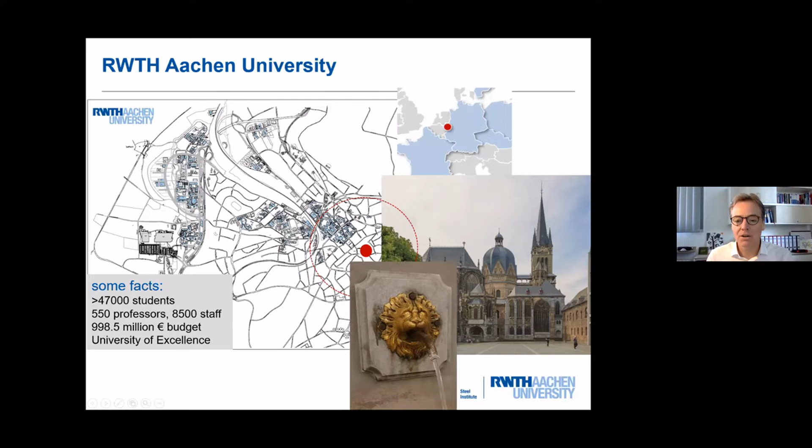And then we have Aachen University. It's one of Germany's large technical universities. We have a turnover of about 1 billion euros per year, and we belong to Germany's Universities of Excellence.

The university had grown, and that is the Aachen city center - it became larger and larger. We have an outward campus, and it spread from the Aachen city center to the Netherlands border.

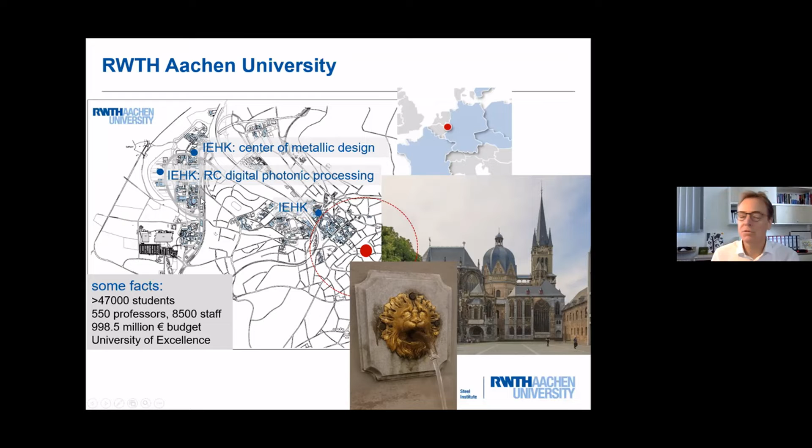Here you find the Steel Institute, and we have two further locations: the Center of Metallic Design, where we do testing, or servohydraulic testing, and here we have a research center for digital photonic processing, meaning additive manufacturing.

Mining and metallurgy was a nucleus 150 years ago, and in 1910 the Steel Institute was founded by the famous Professor Fritz Wüst - after him the iron oxide, wüstite, was named. In 1945, it was unfortunately completely destroyed during World War II. That is how it looks like today.

We are about 110 employees, and our research covers the complete value chain of engineering alloys, from casting, forging, additive manufacturing, analytics, and testing in simulation and experiment. And that covers also internal corrosion issues.

Let me explain what internal oxidation is. Internal oxidation occurs in a binary alloy where the oxygen partial pressure is not sufficient to oxidize the substrate, but is sufficient to oxidize the alloying element B. Then oxygen diffuses into the alloy, B diffuses outwards, and we get internal B oxides. Essentially, a similar situation is given if...

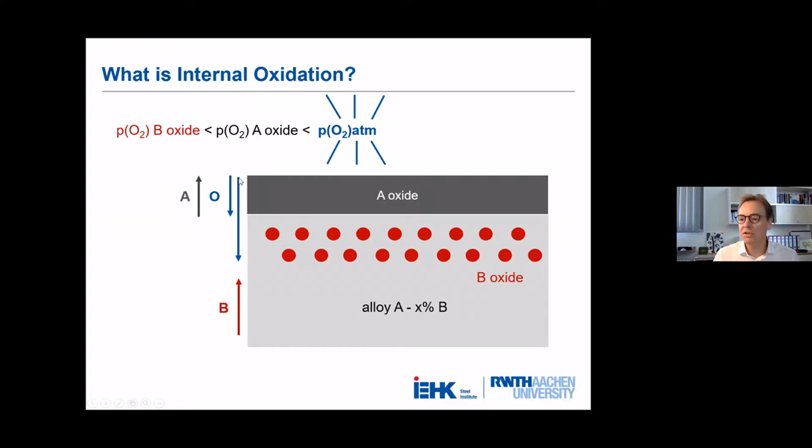The equilibrium partial pressure of A oxide is higher than that of B oxide... sorry, that's the wrong way around - so when it's lower than the oxygen partial pressure, then A oxide is formed. So that must be the other way around, sorry for that. Then the superficial A oxide is formed, and its further growth is governed by oxygen and A diffusion. But at the same time, at the interface between the A oxide and the alloy, the oxygen partial pressure is still sufficient to form internal B oxide, as shown here - again driven by oxygen diffusion and B outward diffusion.

Here we have an example: a nickel-10-chromium alloy. Here we see the formation of nickel oxide, which is a fast-growing oxide. At the same time, we have the situation of internal oxidation of chromia. Of course, due to the consumption of nickel during the process, the part of the internal oxidation will soon be inside the nickel oxide.

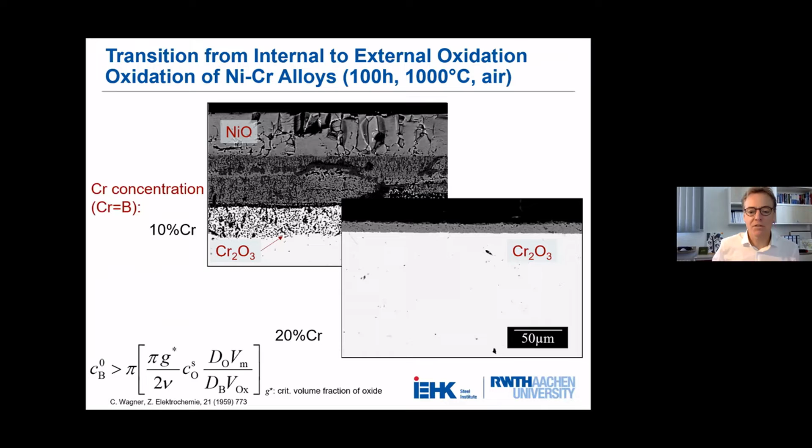But if we increase the chromium concentration to 20%, then the outward B diffusion is much higher, and we get a superficial scale instead of internal oxidation. That is basically the concept of selective and protective oxidation, and the minimum concentration can be predicted according to the famous Carl Wagner theory of internal oxidation, where CB-zero is the minimum concentration for the transition from internal to external oxidation.

Internal nitridation is essentially the same. We have the situation - sorry, that must be the other way around - if the equilibrium partial pressure of B nitride is lower than the nitrogen partial pressure, then we get the formation of internal B nitrides. The nitrogen diffuses inwards and forms B nitrides.

Here you can see an example of a nickel-chromium-aluminum-titanium alloy, and here you see the internal nitridation attack. Once we apply a tensile load on this situation, we see brittle cracking within this near-surface layer. If we have a closer look, this is due to the complete coverage of the grain boundaries by internal nitrides.

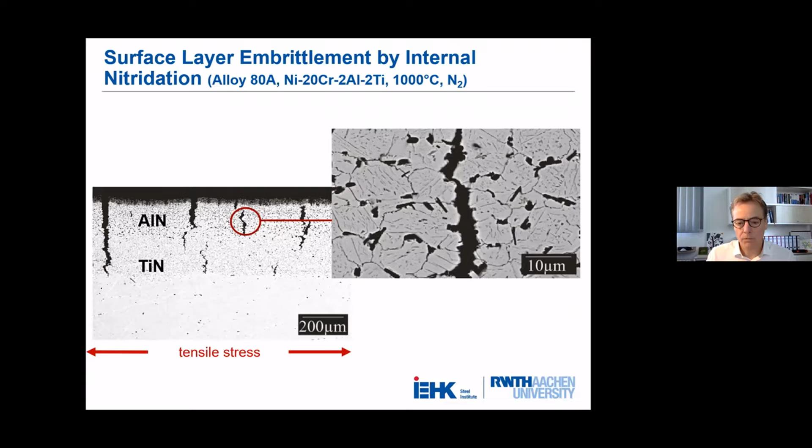Both internal oxidation and nitridation can be described by Carl Wagner's theory of internal oxidation. Here's the solution of the diffusion differential equation for oxygen diffusion and for B diffusion in an alloy AB.

These two solutions can be coupled by a mass balance at the precipitation front. That means the flux of oxygen diffusing to the precipitation front and B must be essentially the same with respect to the stoichiometric coefficient. Assuming a parabolic progress of the internal precipitation zone, and the condition that B diffusion is much slower than oxygen diffusion, we arrive at this very simple equation for the progress of the internal oxidation or nitridation front.

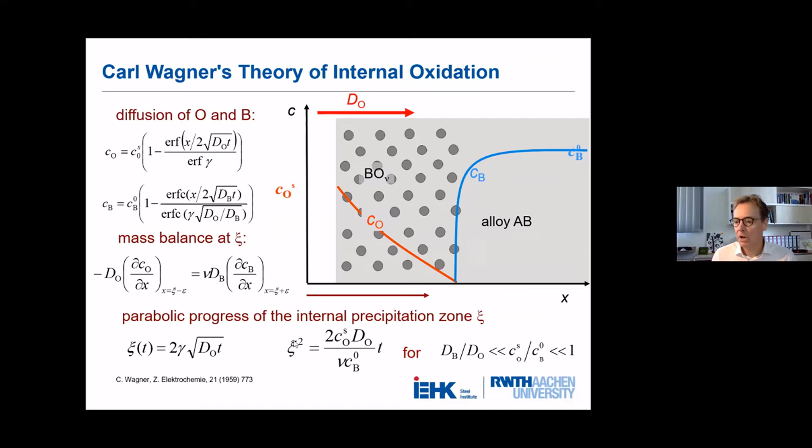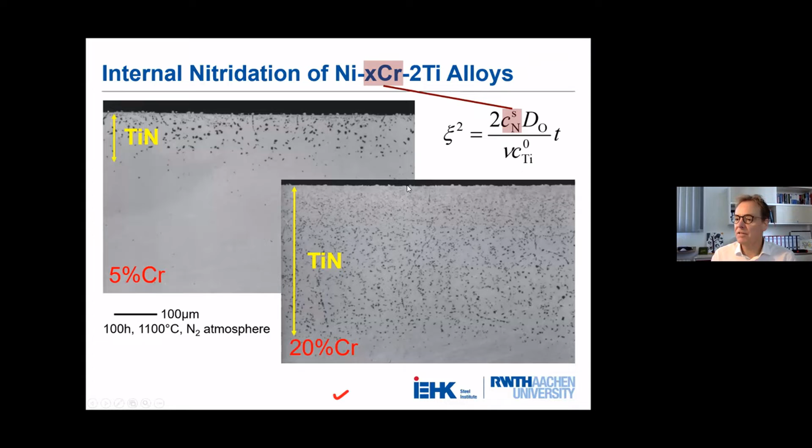If we increase the solubility, meaning more nitrogen, then we get a higher internal nitridation depth, as shown here, because adding chromium increases the solubility for nitrogen. Then of course the nitrogen diffusivity also plays a role in this equation.

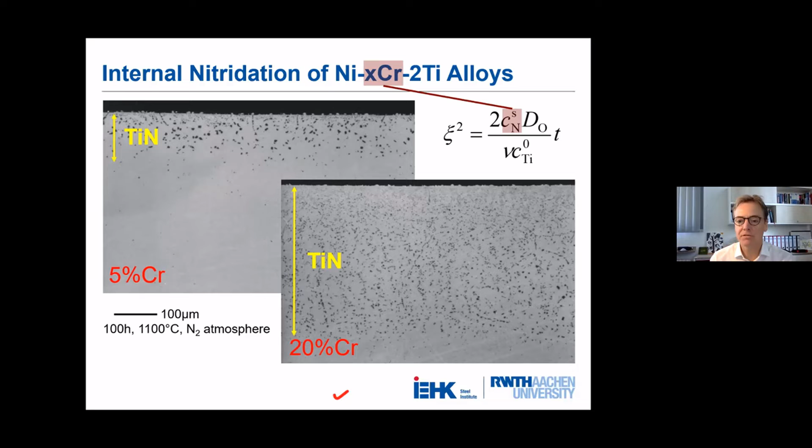However, the Wagner approach is an oversimplification because it does not consider thermodynamics and the effect of mechanical stresses. I would like to give you an example.

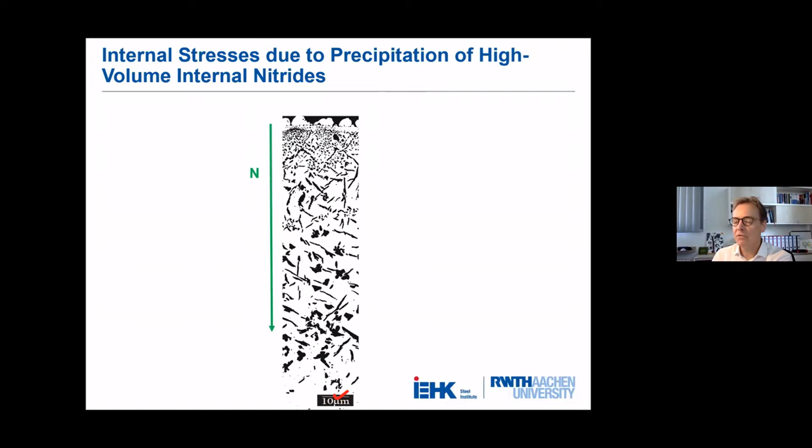Once more, here we have internal nitridation, driven by nitrogen inward diffusion. When we carry out X-ray diffraction measurements of the residual stresses, we see about 370 megapascal in compressive stresses, and these compressive stresses are due to the higher specific volume of the nitrides as compared to the substrate.

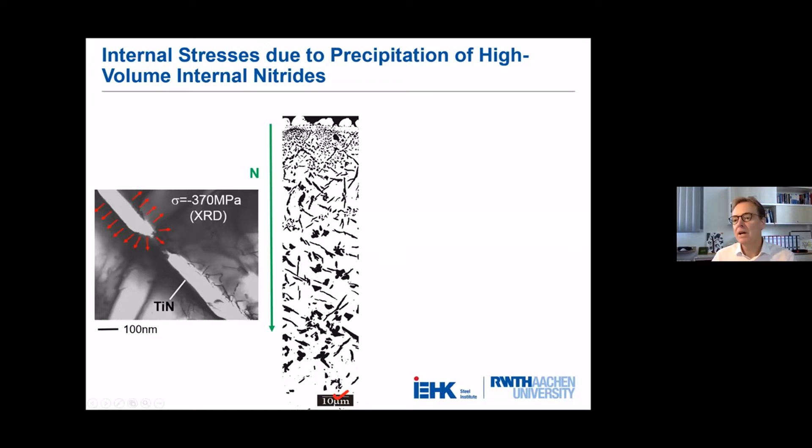This higher specific volume causes outward diffusion of the substrate metal atoms. That can be seen forming these kinds of substrate metal protrusions at the surface. The mechanism we assume is either Nabarro-Herring creep or dislocation pipe diffusion, and by TEM you can see an increased dislocation density in the precipitation area.

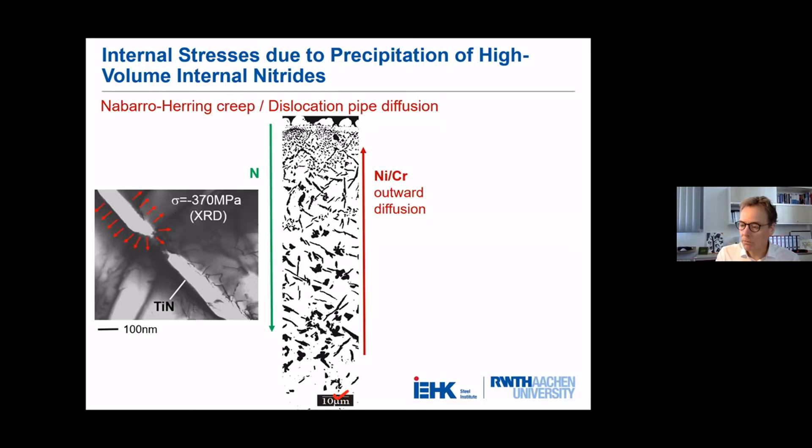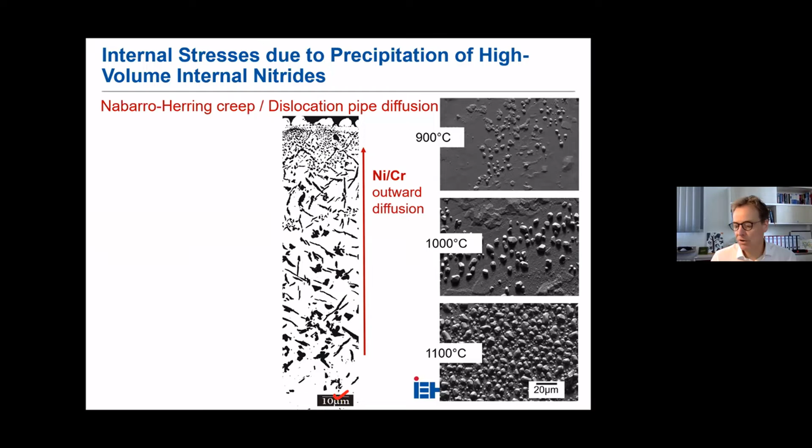If we take a more quantitative look, we see internal nitridation at different temperatures: the higher the temperature, the deeper the internal nitridation attack, and the higher the surface coverage by these substrate metal protrusions. If we quantify it, the surface coverage corresponds nicely to the precipitation depth of internal nitridation.

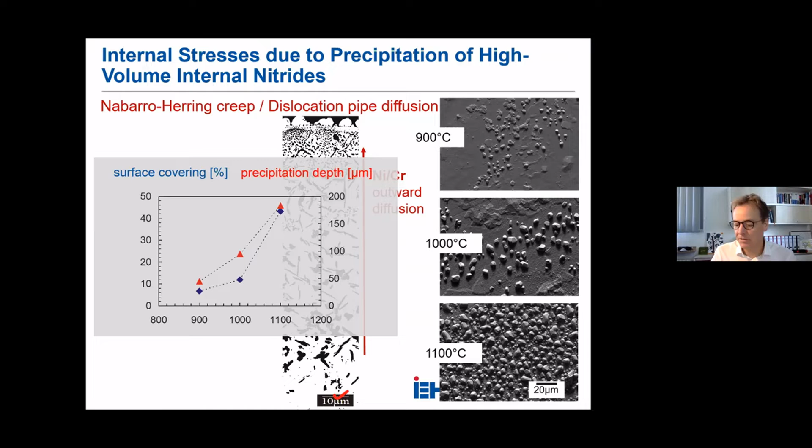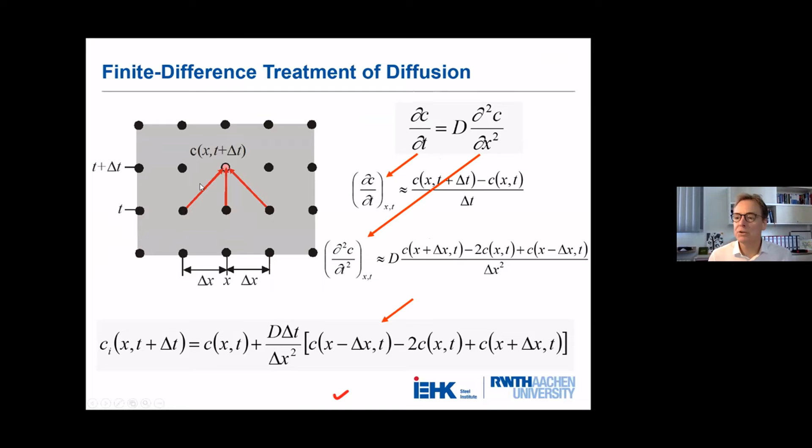To account for this kind of effect, we tried to solve the Wagner equations, the underlying diffusion equations, numerically by means of finite differences. The differentials of Fick's second law are replaced by difference quotients. Basically, we have three concentrations at a time step t, and using these three concentrations we can calculate the concentration of the following time step using this difference equation.

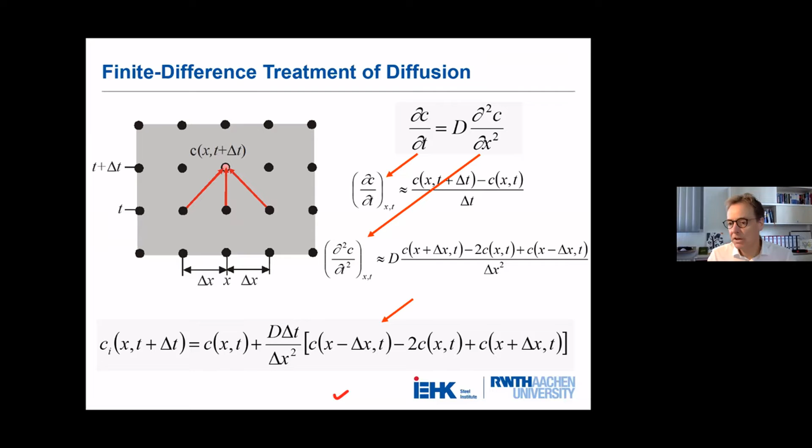That is pretty simple, but we have to consider the precipitation process, meaning the thermodynamics. What we are doing is we have implemented the calculation using ChemApp—you can also use Thermo-Calc, it's pretty much the same. Then we take the calculated concentration and correct it according to thermodynamic equilibrium, giving us new concentrations, and then we can calculate the concentration at the next step.

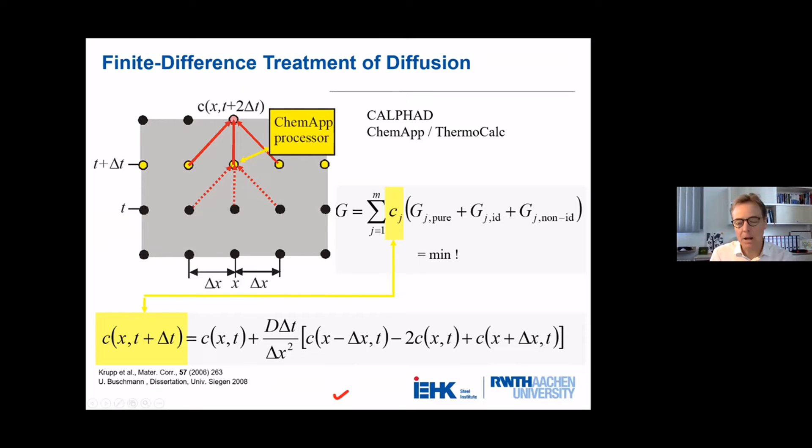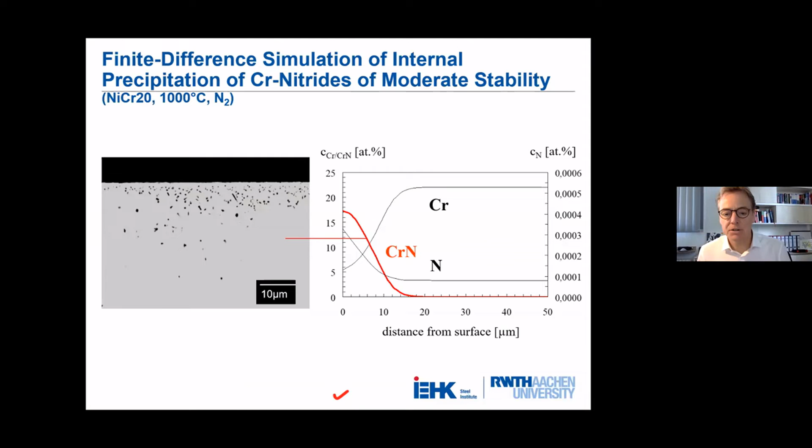That allows us to predict internal corrosion also of precipitates of moderate stability. An example is chromium nitride, as you can see here, where we have some kind of a diffuse precipitation front.

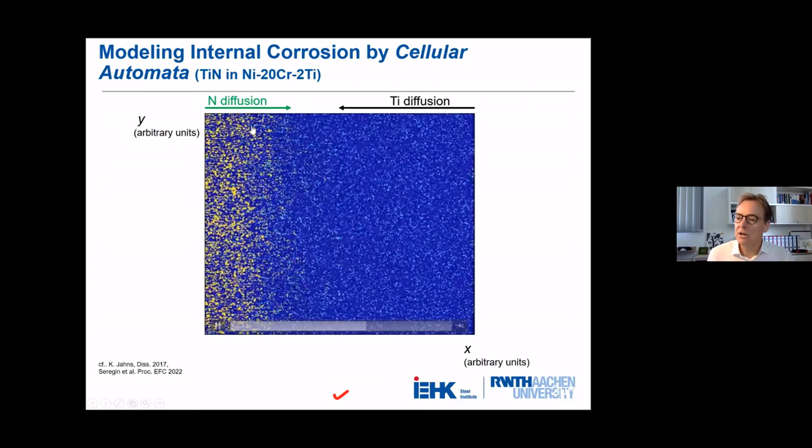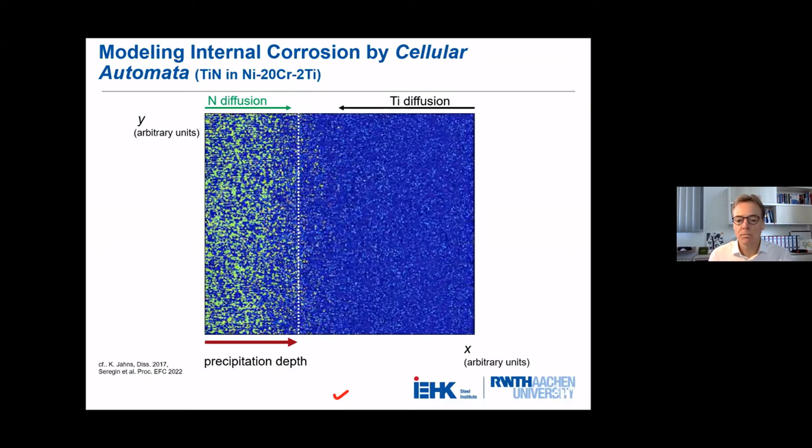More recently, we have been using the method of cellular automata, where we use the probabilities of particle movement in spatial directions—to the top, to the bottom, ballistic or in the diffusion direction. Doing this, we can see the diffusion of nitrogen and the counter-diffusion of titanium, and here in green-yellow you can see the ongoing precipitation, which allows us to predict the precipitation depth. The advantage of this method is that we can consider the various transport paths and stresses and so on.

Well, in most technical applications, we observe both oxidation and nitridation simultaneously, and often failure of a protective scale leads to internal attack. Here are two examples from technical failure cases.

First, a broken natural gas burner, where we had a large crack, and then this complete burner was broken and not working anymore. When we had a look at these cracks, we found a massive internal nitridation attack of 0.5 millimeter. So obviously, the chromia scale was not able to protect this material.

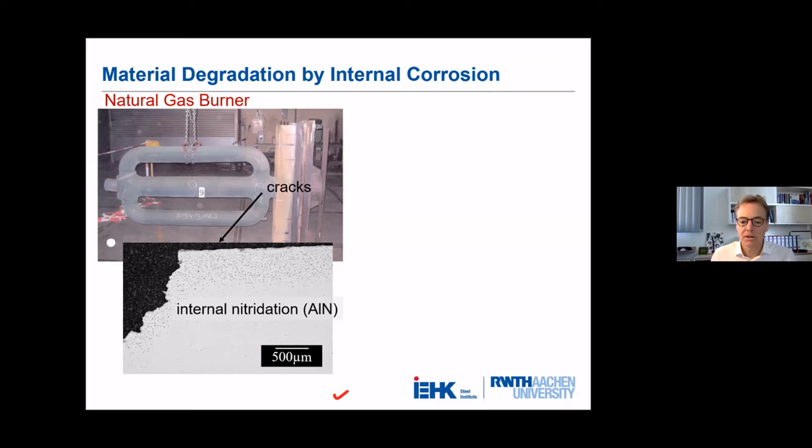And the second, a furnace bolt that is probably due to overheating, and then we can see massive internal oxidation, intergranular oxidation attack by internal chromia and internal oxidation by silicon.

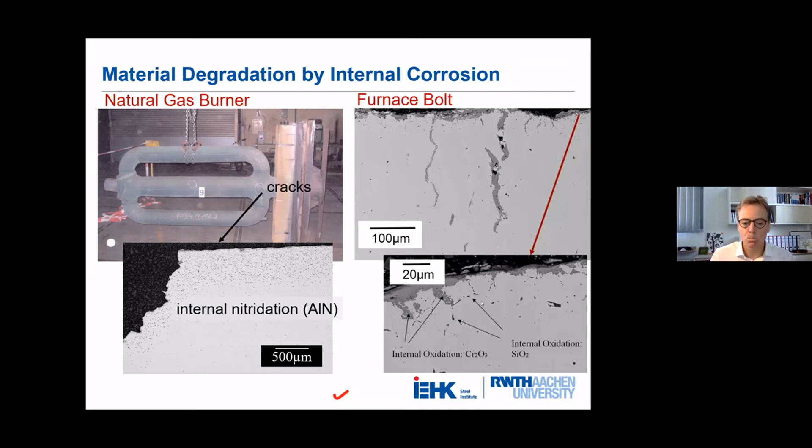If you go back to the schematics, then we have a situation where we have the A oxide and internal oxidation of B oxide, but at the same time we have a high nitrogen partial pressure. That's a situation we have in air. If a mechanical load is then superimposed, the oxide may crack, giving access for the nitrogen, and then there's a risk of deep internal nitridation attack.

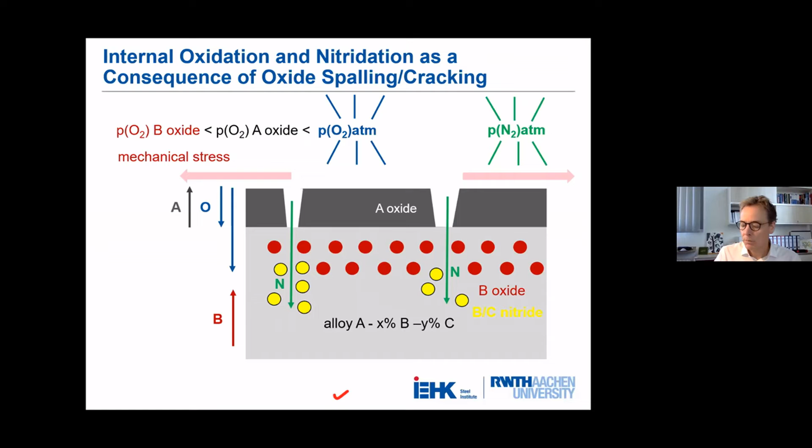Here's an example of an artificial crack that we introduced by a diamond saw cut. Basically we had 100 hours of oxidation, forming a chromia scale. Then we applied the saw cut, followed by 100 hours of nitridation experiment. As you can see, we have an increase in the nitridation attack, and that is supported by the simulation result as well.

That is shown by a two-dimensional finite difference simulation.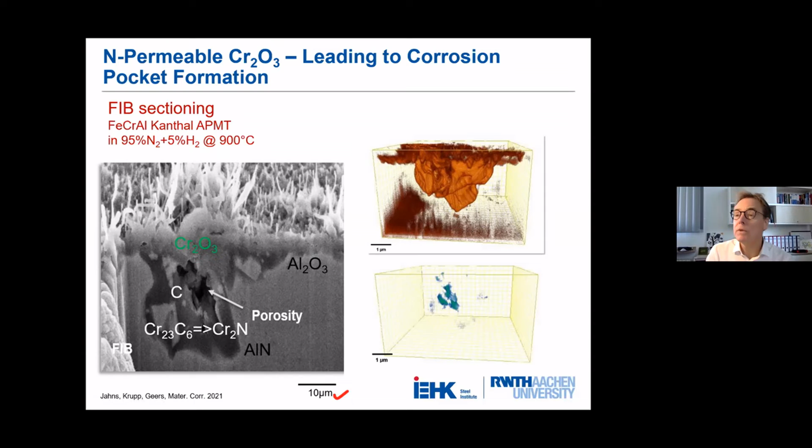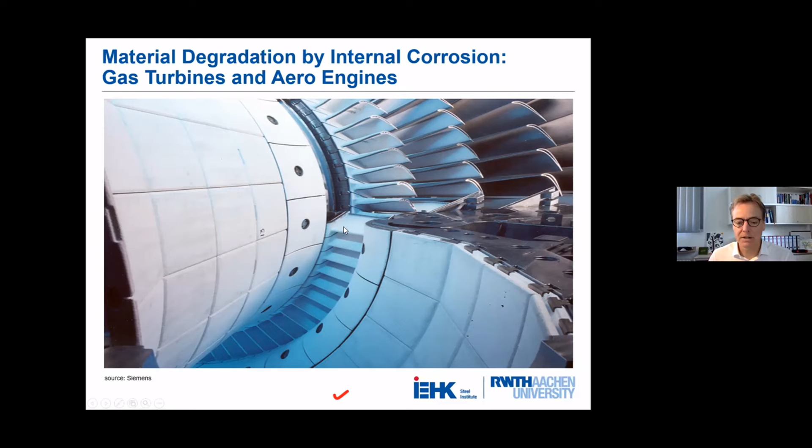Ladies and gentlemen, an exceptional combination of high temperature and stresses can be found at gas turbine blades in gas turbines. These loadings we try to simulate by means of thermal cycling, TGA. That is something I think Daniel will report on later on, so I don't want to focus on that.

Instead, creep testing - here we did creep testing in a pure nitrogen atmosphere, which means this glass cylinder is fed by nitrogen, and immediately at the sample we place a package of titanium sponge in order to reduce the oxygen partial pressure and really focus on internal nitridation.

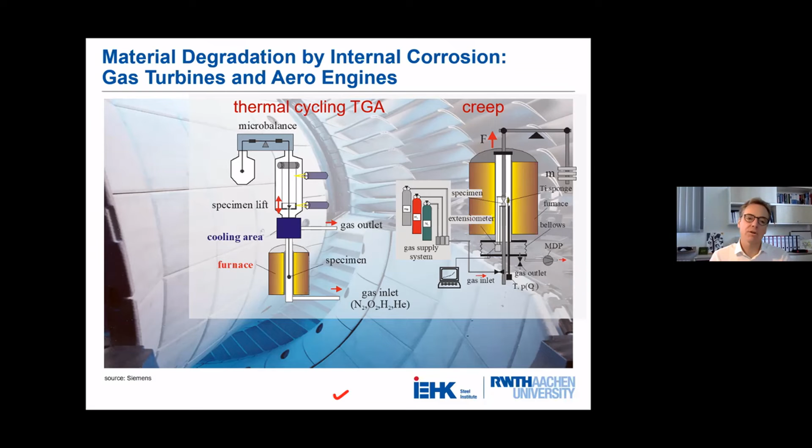Let's first have a look at isothermal oxidation of CMSX4, a single crystalline material used for gas turbine blades. As you can see here, although we have a smooth alumina scale, if we change the situation from isothermal to thermal cyclic exposure, which means every 5 hours the sample was cooled down, and we were using this kind of wedge-shaped sample with a sharp tip.

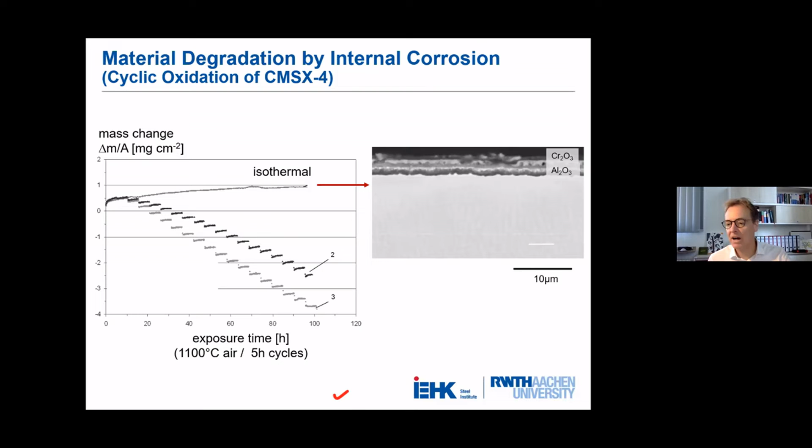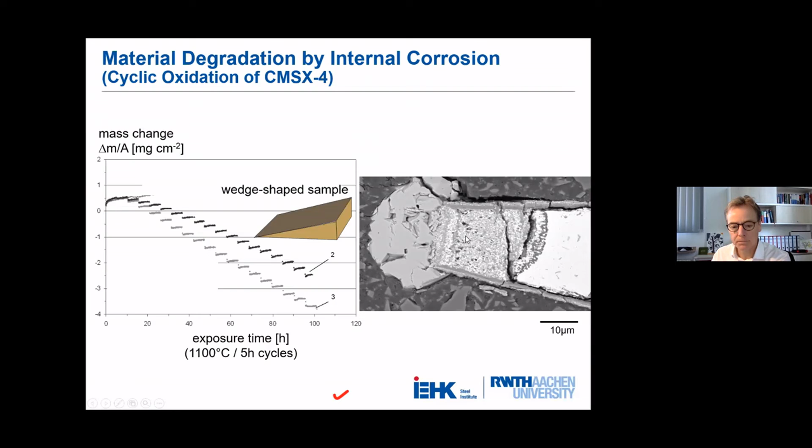If we have a look at the sharp tip under these cyclic oxidation conditions, we can see a massive degradation of the material behavior. If you have a closer look,

then we see that thermal cycling causes repeated alumina spallation that ends up in a near-surface aluminum depletion. This aluminum depletion causes a transition to non-protective nickel oxide formation, fast growing, as you can see - we call this a cauliflower, this fast growing nickel oxide. This then leads to internal oxidation and nitridation in combination with massive internal stresses and crack formation.

Well, when we want to simulate such conditions, we have to take into account that the diffusivity is increased by the superimposed creep stress, and that is shown here.

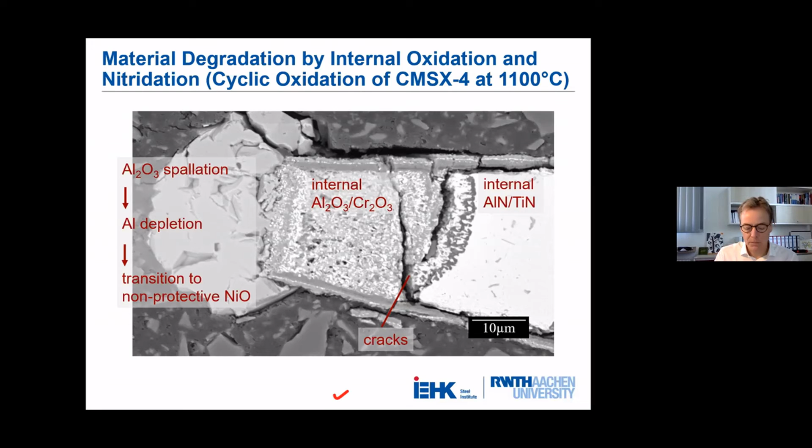That is an experiment under a pure nitrogen atmosphere. Here we have the situation of the sample where we do not have high stresses, nearly 0 megapascals, and if we apply then 30 megapascals, we have an increase by almost 100% in the internal nitridation depth. That means it is essential to take the creep stresses into account.

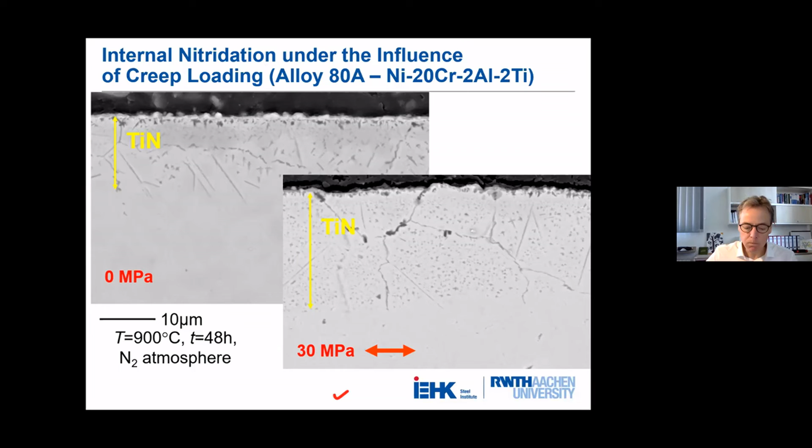Finally, I would like to address the influence of diffusion paths with a focus on grain boundary diffusion. We know that the lower the temperature, the higher the influence of grain boundary diffusion.

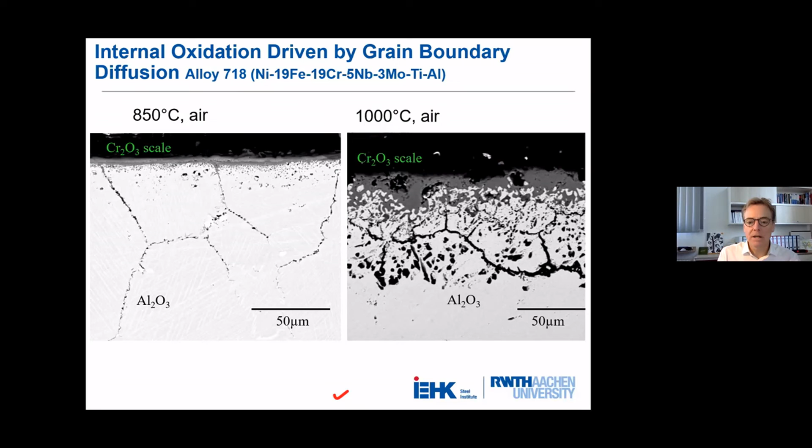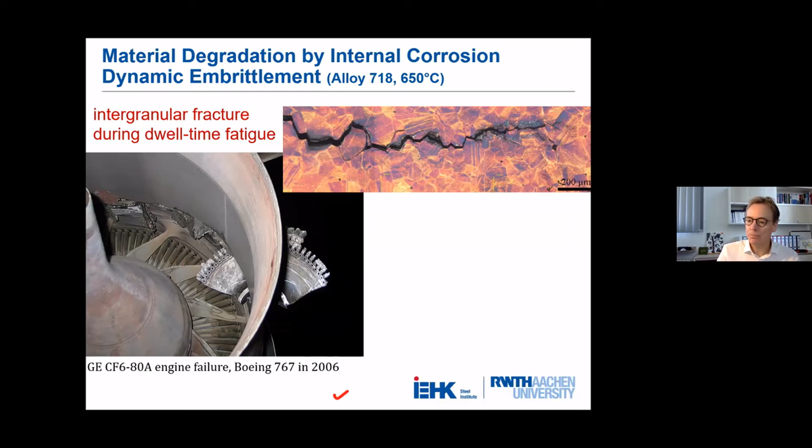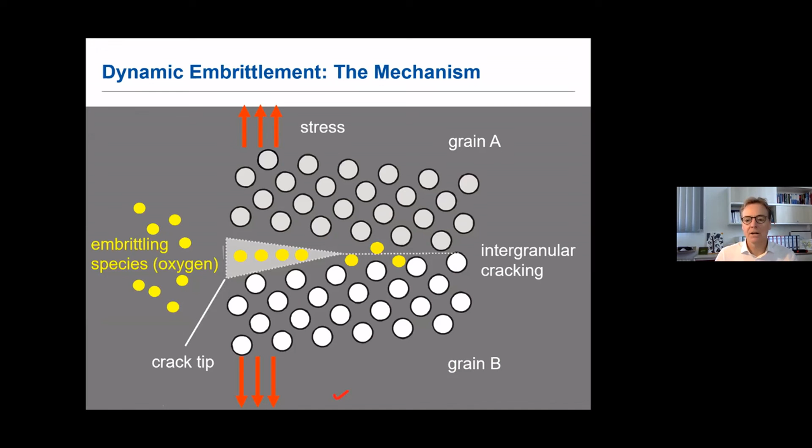This is a fatigue crack propagation rate, which is much higher than what we observe under non-dwell time conditions. The mechanism behind that is we have a tensile stress acting on the grain boundary plane, which drives oxygen diffusion into the grain boundary, lowering the cohesion of the grain boundary, and finally causing intergranular cracking on a nanometer scale.

Under vacuum conditions or without dwell time, we have only cycle-dependent crack propagation, as shown here with the typical fatigue striations.

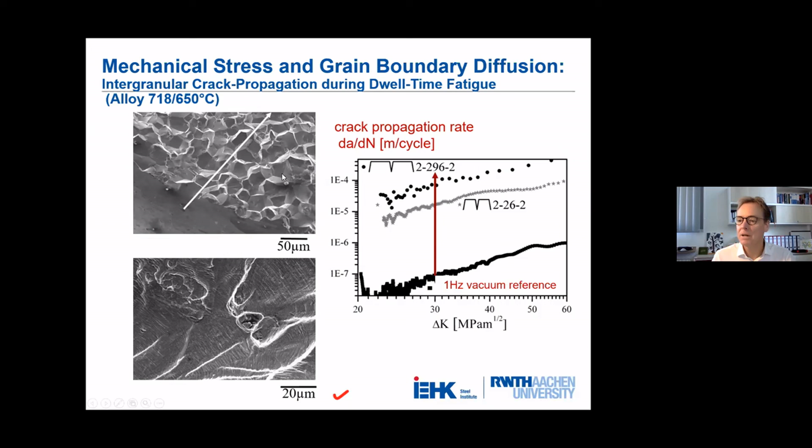Once we increase to dwell times, we have an increase in the crack propagation rate by two orders of magnitude, meaning 100 times faster crack propagation, and the fracture surface looks completely different. Here we see the non-deformed grain boundary facets. That is the influence of the dwell times.

If we have a closer look at what's going on, during the dwell time we have oxygen build up, and during the load reversal we observe the crack advance. So once we know about this mechanism, we can look deep inside and adjust the grain boundary structure. For instance, we can apply grain boundary engineering type processing in order to improve the resistance of the material to this kind of damage.

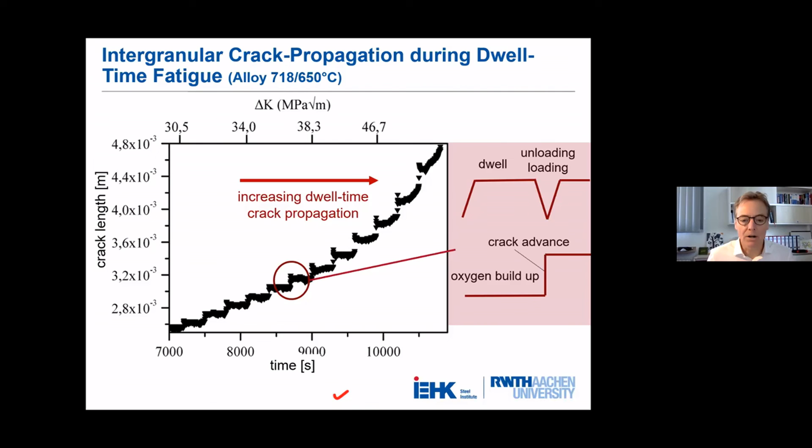Since my 30 minutes are over, I would like to come to some conclusions. I hope I could show you in which way internal corrosion is driven by the diffusivity of the reacting species and thermodynamic stabilities.

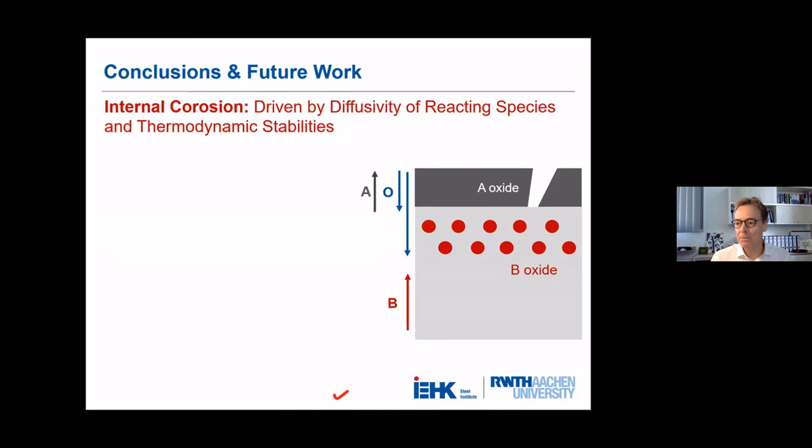It's strongly influenced by mechanical stresses, and these mechanical stresses can be due to the geometry, for instance at edges, growth stresses of the oxide, or the difference in the coefficient of thermal expansion, also applied loads, which causes cracking of the oxide and then an increase in inward diffusion of the corrosive species like oxygen or nitrogen.

If you have a closer look, there are also intrinsic effects. Diffusion can be enhanced by diffusion along the interfaces. The diffusion can be driven by the occurrence of mechanical stresses due to the higher volume of the internal precipitates, which causes an increase in dislocation density, and then an increase in dislocation pipe diffusion.

That is what we are right now trying to implement in our numerical approaches, which gives us a bit more freedom than, for instance, the analytical model of internal oxidation as suggested by Carl Wagner in the late 50s.

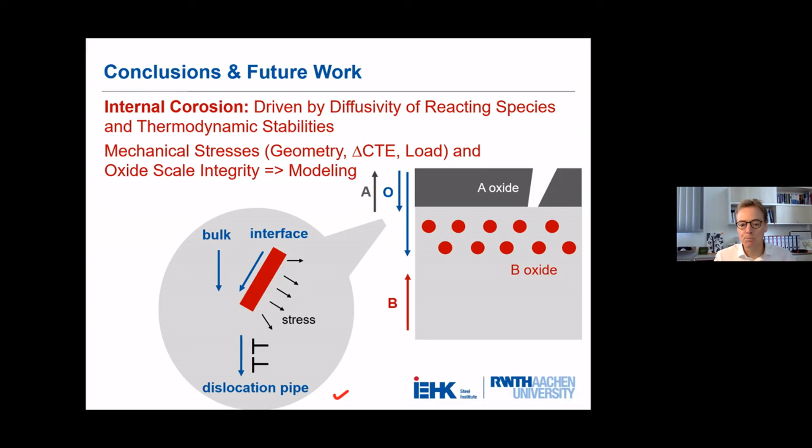At the end, I would also like to mention that internal corrosion can also have a technical benefit. We use it, for instance, in nitridation and carburization of steel, giving us a high strength surface.

In a larger European project, we use internal oxidation as one method for oxide dispersion strengthening of powder particles for additive manufacturing. We can also use it for surface treatment in hot dip galvanization of manganese steel, because hot dip galvanization with manganese oxide present is hardly possible.

Therefore, what we do is an oxidation treatment. Then we get an external iron oxide scale and internal manganese oxides, followed by a reduction of the wüstite, and then we have a nice metallic surface that can be hot dip coated.